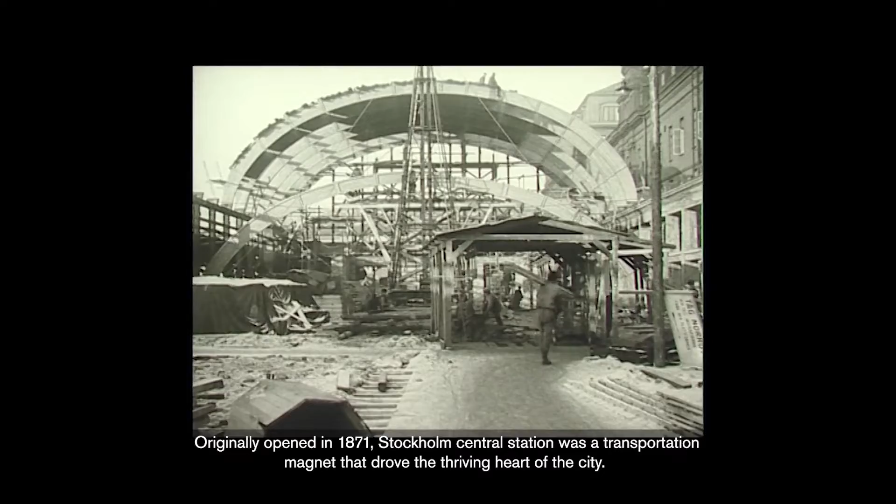Originally opened in 1871, Stockholm Central Station was a transportation magnet that drove the thriving heart of the city. But it had a detrimental effect on the urban fabric, which was compounded by the impact of the car in the 1960s. This commission to oversee the expansion of the rail network and provide a new master plan for the area gives us a great opportunity to reinstate the central station's position in the city and develop Sweden's most central hub for sustainable travel.

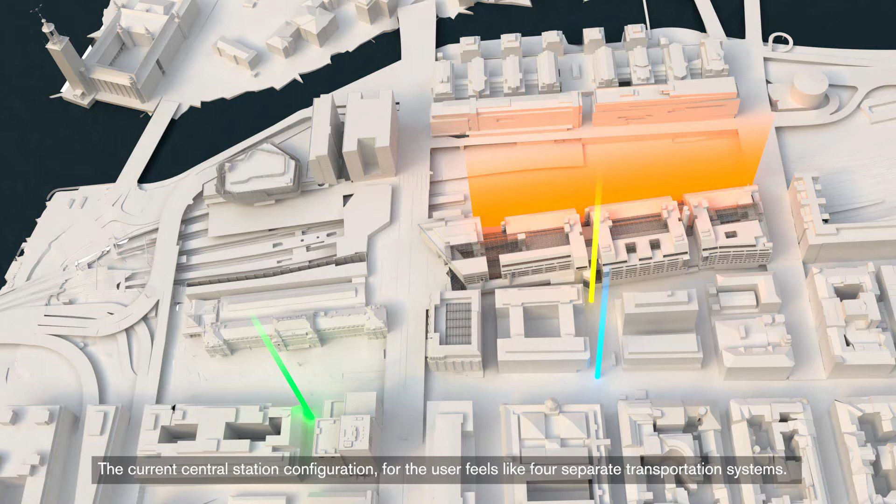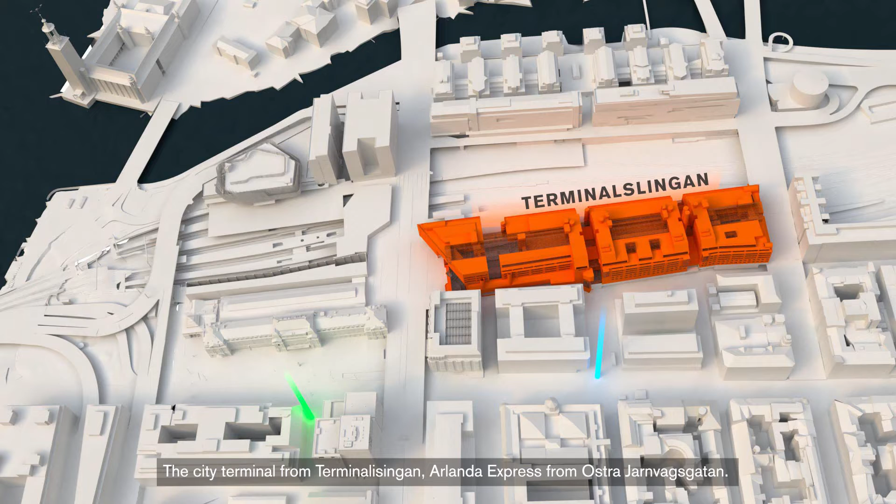The current central station configuration for the user feels like four separate transportation systems, with the central station, the Citybanan, the green and blue metro lines all connected from different sides of Vasagatan. The city terminal from Terminalslingan, Arlanda Express from Östra Järnvägsgatan.

Trafikverket's proposed track layout with extended platforms will lead to an increased capacity of 40% and a doubling of passenger numbers. We therefore have the opportunity to bring together all modes of transport in a single transportation hub by making the following big moves.

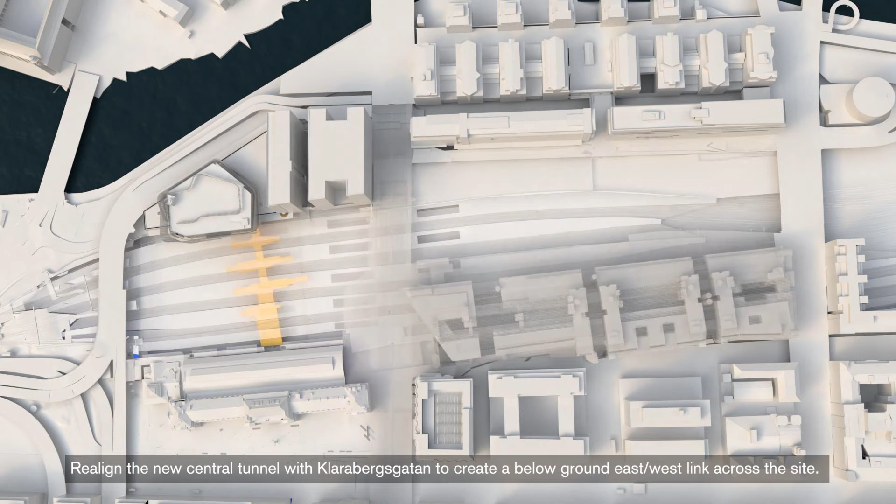Realign the new central tunnel with Klarabergsgatan to create a below-ground east-west link across the site. A possible future addition of a new tunnel could provide a below-ground connection directly through to the Citybanan.

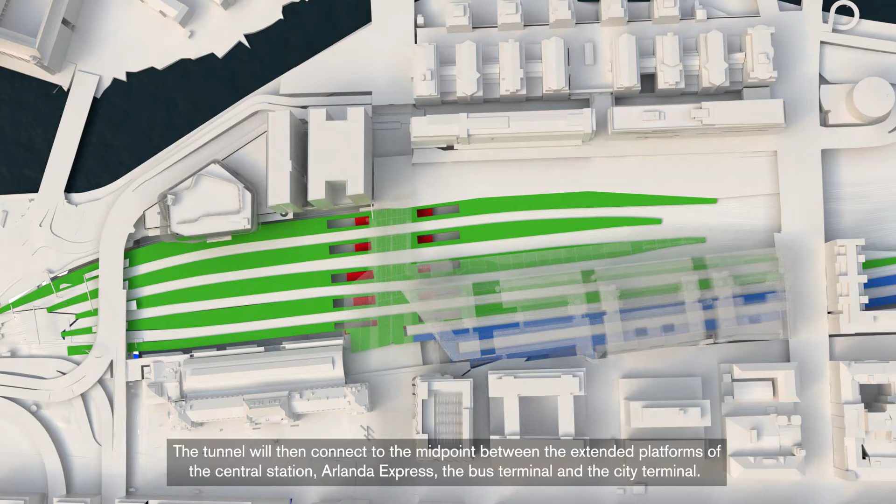The tunnel will then connect to the midpoint between the extended platforms of the central station, Arlanda Express, the bus terminal and the city terminal, which allows us to bring together four modes of transport to create a single intermodal station. For future flexibility of the track layout, we have chosen advanced construction techniques to bridge across the track.

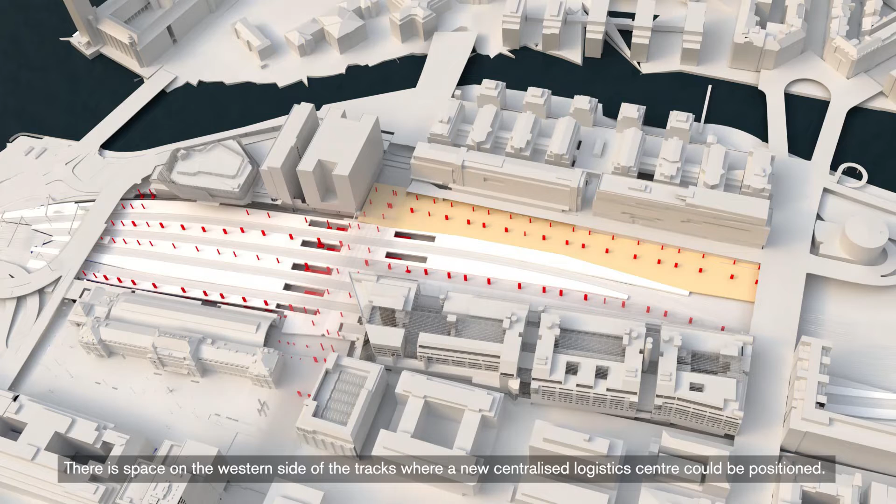There is space on the western side of the tracks where a new centralised logistics centre could be positioned. Goods and refuse will then be serviced directly from the tracks without disturbing the public realm above.

By redirecting private vehicles and only keeping the bus route, we can remove half of the Klarabergsgatan viaduct. This creates the space which allows us to extend the northern end of the historic waiting hall.

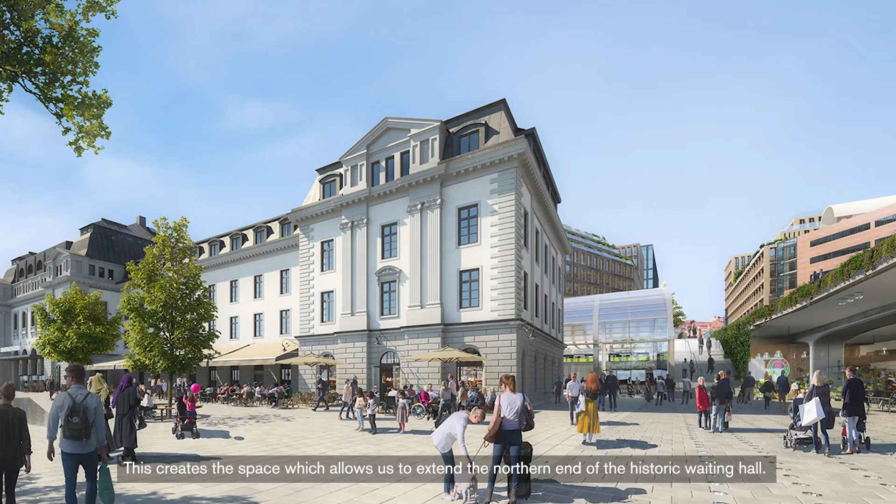A new entrance hall will combine the new and historic parts of the station, linking the central station platforms, the city terminal buses and the Arlanda Express trains, creating a single intermodal transport hub.

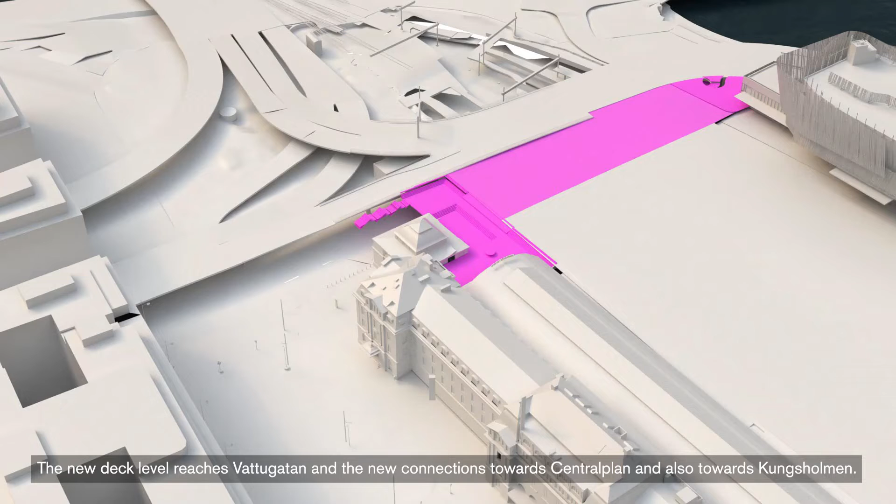The new deck level reaches Vattugatan and the new connections towards Centralplan and also towards Kungsholmen. This enabled a southern entrance to the railway.

Remove the C building to create space for the waiting hall to breathe and open up views of Gamla Stan and Riddarholmen.

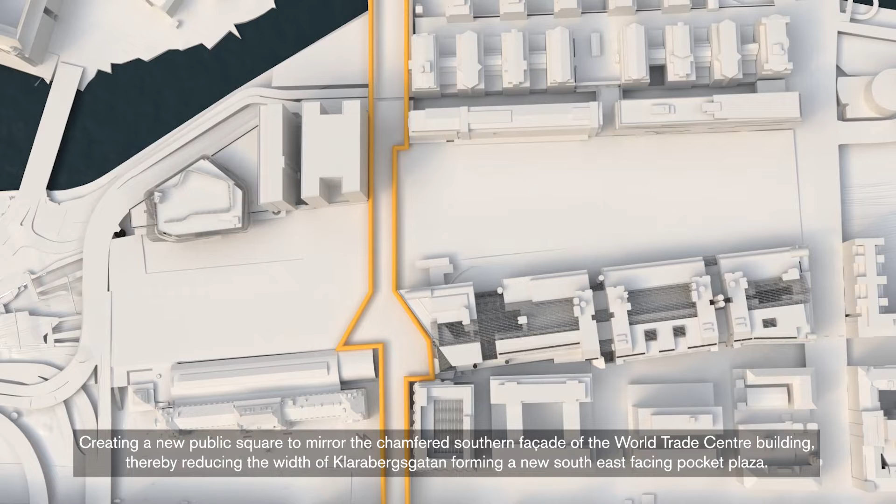Creating a new public square to mirror the chamfered southern facade of the World Trade Center building, thereby reducing the width of Klarabergsgatan, forming a new southeast facing pocket plaza.

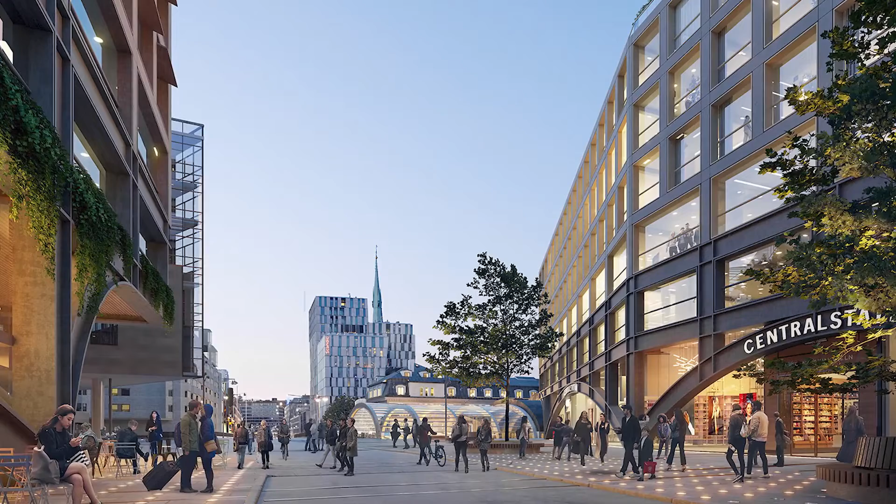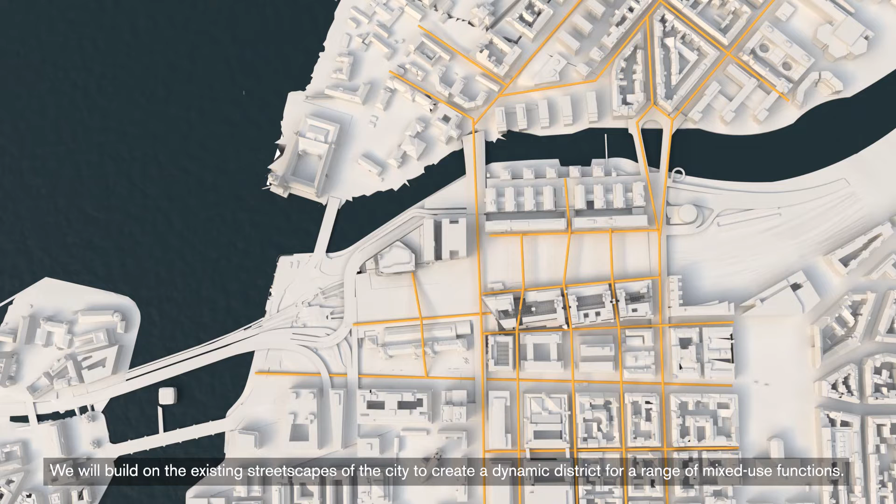To become a natural part of the historic street pattern and recreate the scale of the Klara blocks, we will build on the existing streetscapes of the city to create a dynamic district for a range of mixed-use functions, activated public realm and better connectivity with clear wayfinding.

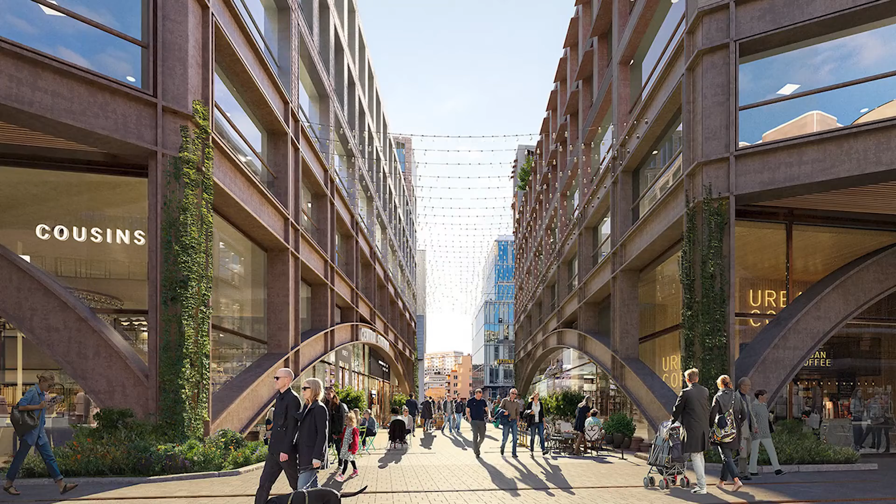Recreate the historic station railway park on the southern tip with spectacular views over the old town of Gamla Stan and Södermalm and the City Hall. It will be a new green meeting place for the city centre.

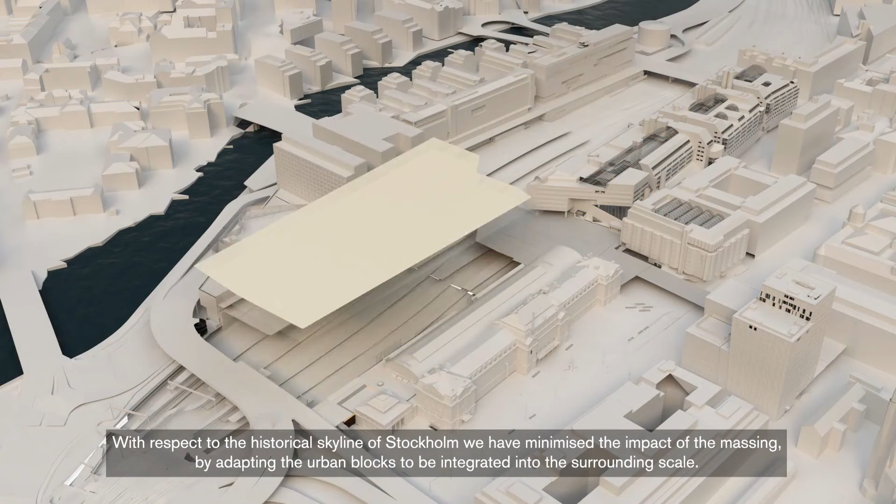With respect to the historic skyline of Stockholm, we have minimised the impact of the massing by adapting the urban blocks to be integrated into the surrounding scale.

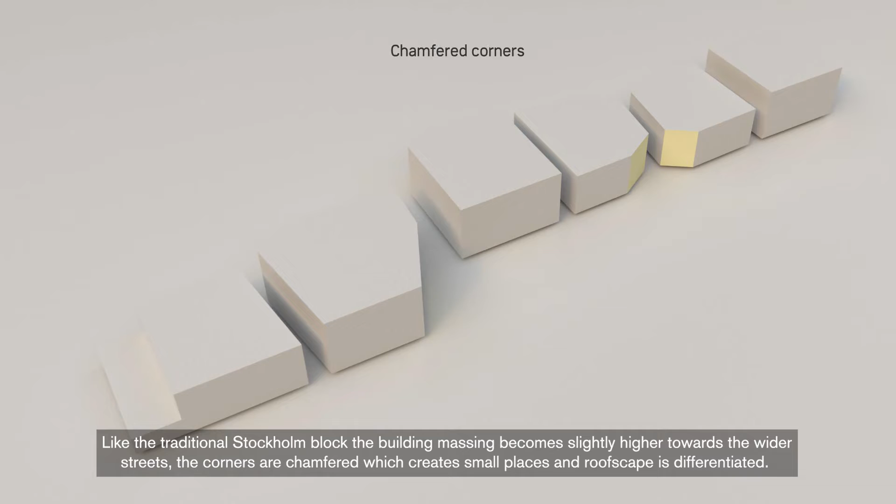Like the traditional Stockholm block, the building massing becomes slightly higher towards the wider streets. The corners are chamfered, which creates small places, and the roofscape is differentiated.

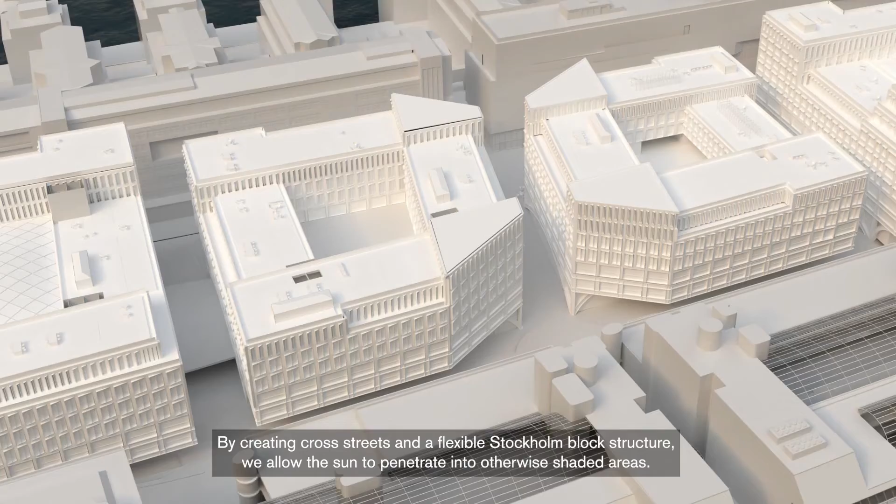By creating cross streets and a flexible Stockholm block structure, we allow the sun to penetrate into otherwise shaded areas. The blocks are a contemporary interpretation, but also moulded to respond to their environment.

Here, with the arch, recognised in many of Stockholm's bridges and seen in many railway buildings, we see an example of architecture and structure that gives a strong identity to the base, the station functions and the railway.

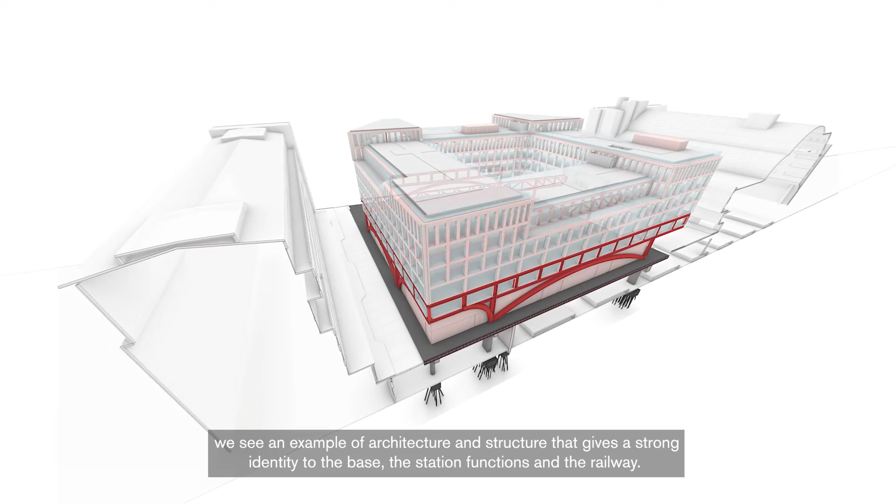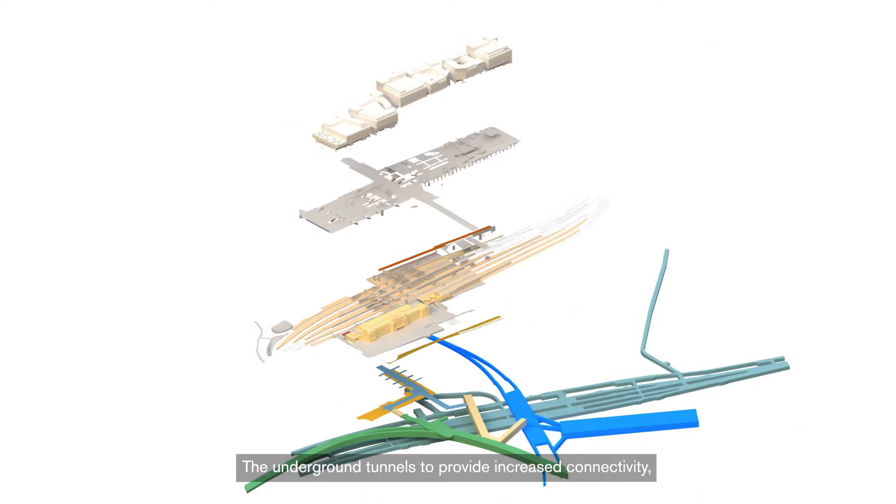The station and integrated buildings forming the new transportation hub function on four different levels: the underground tunnels to provide increased connectivity, the platform level with extended access for increased capacity, the upper deck level with new vibrant public realm, and the new mixed-use development above.

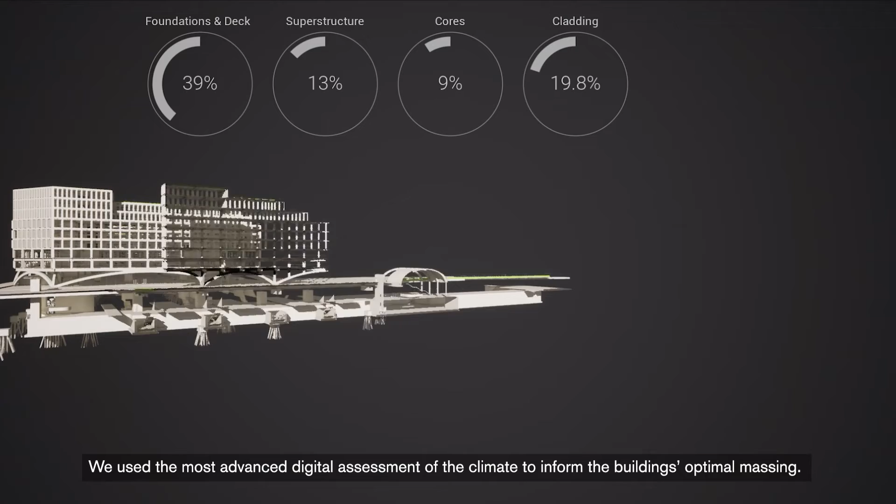Our aspiration was to create the world's first climate restorative transport interchange. We have used the most advanced digital assessment of the climate to inform the building's optimal massing.

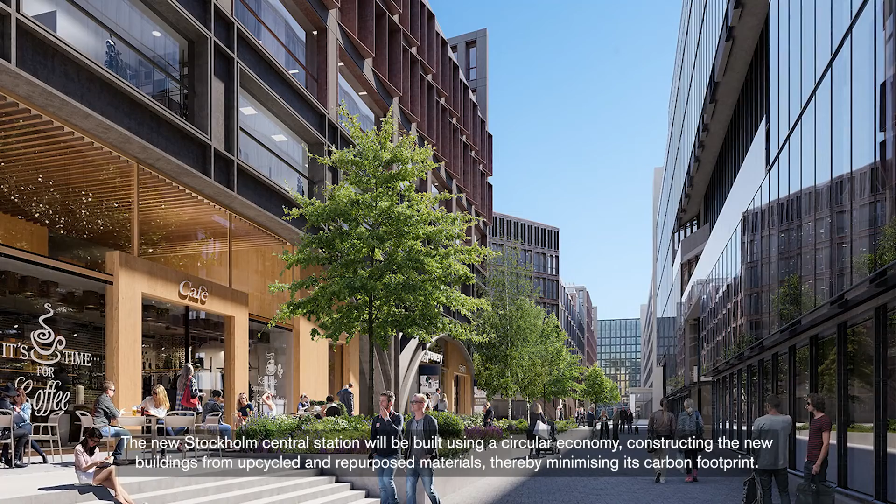The new Stockholm Central Station will be built using a circular economy, constructing the new buildings from upcycled and repurposed materials, thereby minimising its carbon footprint. We hope that together we can realise our dream to create the world's first climate restorative transport interchange.

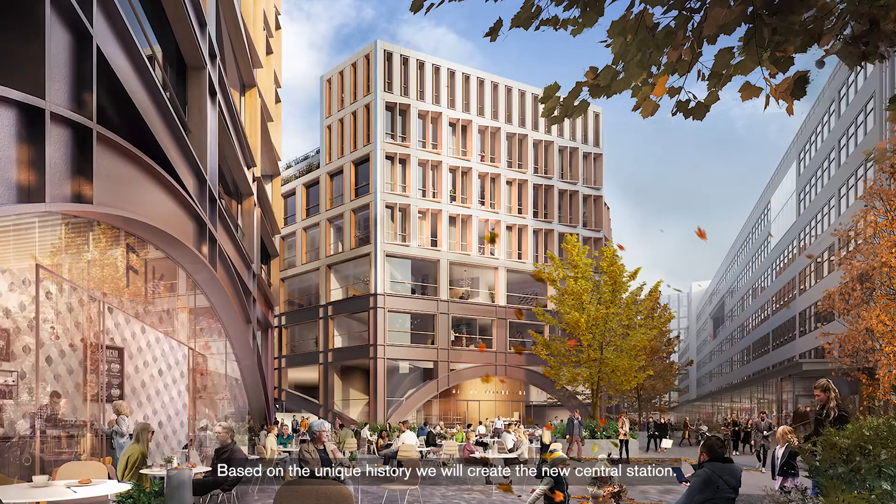Based on the unique history, we will create the new central station, sustainable travel for all of Sweden, and more Stockholm to love.

Welcome to Central Station.